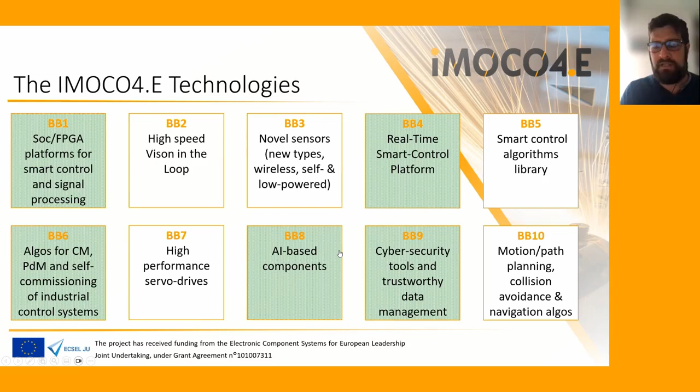The IMOCO4.E technologies can be grouped in 10 different clusters of technologies, 5 of which relate to Pilot 3, and are those depicted here in green. All these developed technologies can be seen as a sort of catalog of hardware and software solutions. And today, thanks to the presentation of Pilot 3, we will see some of them, how they have been designed and implemented in these 5 categories: hardware platforms to control the processing and transmission of data, algorithms for predictive maintenance and artificial intelligence in general, and tools for data management in the networks.

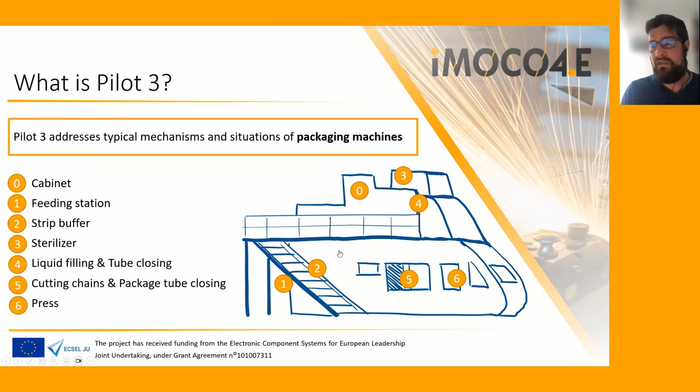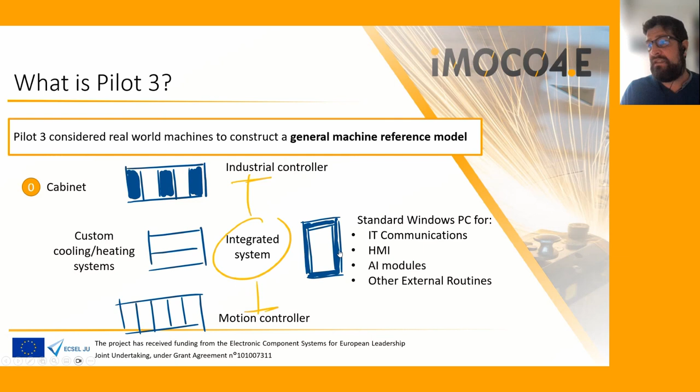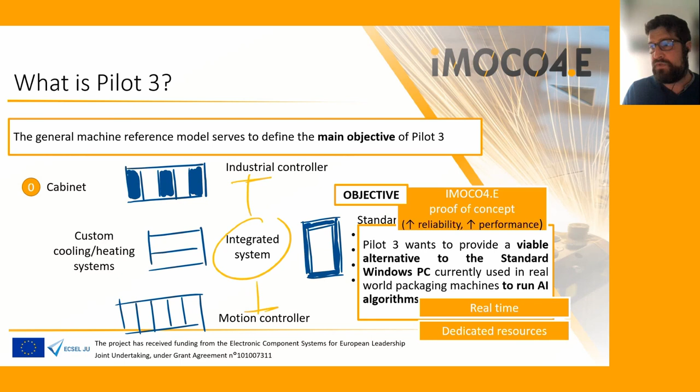But what is Pilot 3 about? Pilot 3 is about the use of the Imoco technology in the context of packaging machines. In particular, we have analyzed real-world packaging machines and defined an abstraction model in order to describe them according to the main parts that form them. And thanks to this model, we have been able to formalize easily and clearly the main objective of Pilot 3, that is the realization of a proof of concept that may allow substituting the currently used Windows PC in the cabinet of the packaging machines to run AI algorithms, with the perspective of guaranteeing real-time performance and dedicated resources, which is not possible with the current PC.

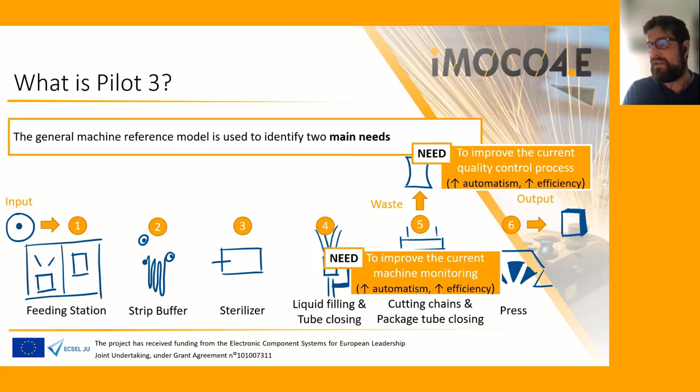The general machine reference model is also used to describe the overall process of the machine, and according to that, identify two main needs targeted by the applications considered in Pilot 3: the need of improving machine monitoring and the need of improving the quality control of the overall process. And the applications considered in this scenario are respectively a blade degradation application, in order to see if the blade works properly or presents some issue, and the improvement of the current quality control process with an application that focuses on checking the bottles in order to automate the identification of bottles that are not formed correctly and must be considered as waste.

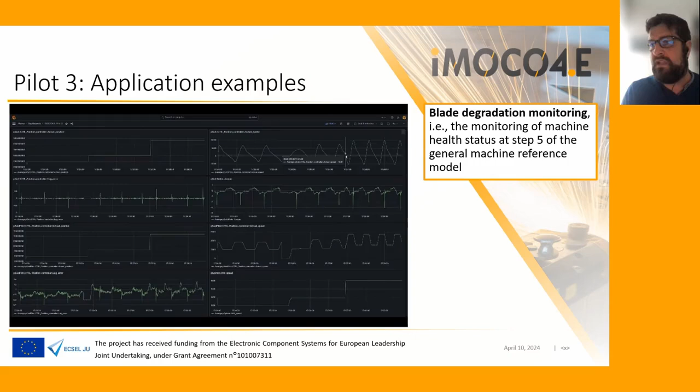So these are two screens that show you the final results in the blade degradation monitoring application and in the bottle check domain. I did the introduction of the webinar, then it's time to leave the floor to the people that actually realized the different technologies that allow reaching the application solutions. And we will start from the physical layer with the presentation of the real-time smart control platform by Fabienne of Unimore, which contains the TSN platform based on FPGA that will be presented by Daniel from SoC-e, and the Huawei Atlas 500 Pro platform that will be presented by Lorenzo of Evidence Huawei.

Then we will see how we set up the solution to transmit and archive data with GNT by Tassos, who will also present two algorithms, one in edge, one in fog environment, for predictive maintenance. And two other algorithms will be presented respectively by Dario and Tarquil. Dario from University of Sassari will present an algorithm for sensor anomaly detection, and Tarquil from Digital Twin Technology will present an algorithm for image anomaly detection. So I will leave now the floor to Fabienne in order to start with the real-time smart control platform.

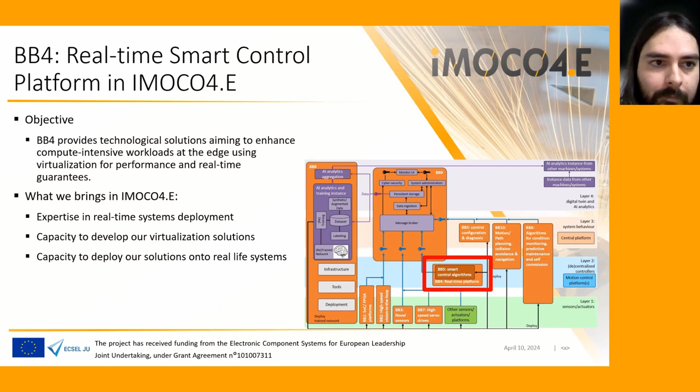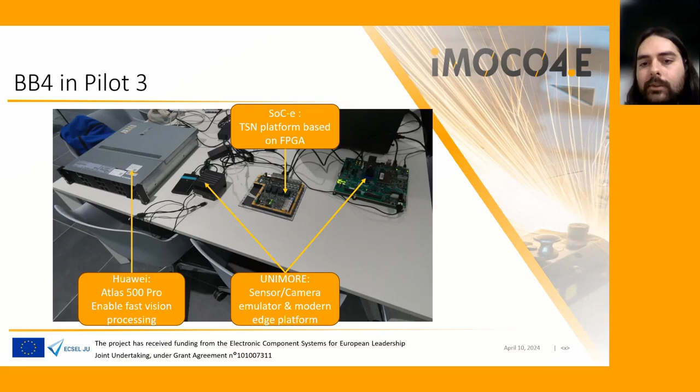But first, before presenting these platforms and the technology inside, I will present some keywords and points that are important to understand the following. The first one is time-sensitive networking, TSN. It comes from the fact that standard Ethernet communication is not predictable. So the IEEE TSN protocols help with deterministic communication and scalability. It supports flexible configuration. It also enables bandwidth reservation and helps interoperability with legacy networks.

The other point that I will present is the hypervisor Jailhouse. It's the hypervisor we use in our solution. It's developed and maintained by Siemens. It's a type 1 hypervisor, and it is open source. It has a minimal runtime code and does not perform emulation or scheduling. It has static partitioning, which means that when a resource is assigned to one VM, it cannot be assigned to another one. So we have CPU isolation, which means that on the platform, the maximum number of VMs available is the number of cores available on the platform.

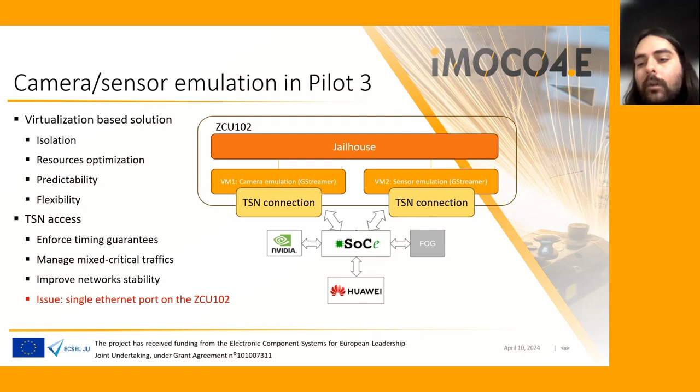However, we have an issue with that. It's that the ZCU102 has only one Ethernet port. So it's the advantage of a virtual TSN. It's that it allows us to use the ZCU with the 2 VMs and allow the 2 VMs to use a TSN connection.

So we add to this system another VM, which is the VTSN switch. And with this help, we also modified the VM of the camera and the VM of the sensors to use this TSN connection, like I presented with the TSN slide. And also, because there are 4 cores on this platform, we add the possibility to use this last core to create another VM, which will act as the actuators of the machine.

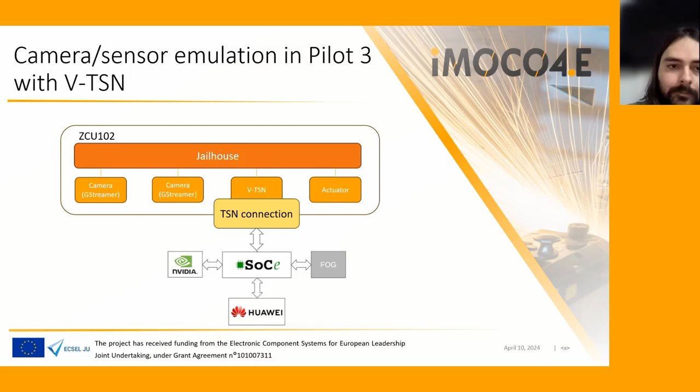So this technology, the VTSN solution, can bring some advantages for the packaging machine sector, because it allows software-defined central control units. So it means that a new software component can be deployed as VMs, and so no need for additional hardware or links between platforms. And also it is the migration from a proprietary fieldbus to TSN. So TSN infrastructure can virtually grow independently from the physical networks.

It also optimizes cost and hardware usage in constrained environments, where TSN connections can be consolidated. And it also brings predictable inter-VM communication. Each VTSN port is independently configurable, and the virtual Ethernet interfaces act as TSN-native virtual links, as I told you. So the future works of this developed technology are to port to a real-time core, for example, the Cortex-R5, and also support different platforms like i.MX8 or NVIDIA platforms like the Jetson, for example.

These 2 points are important because on NVIDIA platforms, so the Jetson, for example, there is a Cortex-R5, and this Cortex can be used to embed the virtual TSN switch, and the other ARM cores, for example, can be used by Jailhouse to create the other virtual machines.

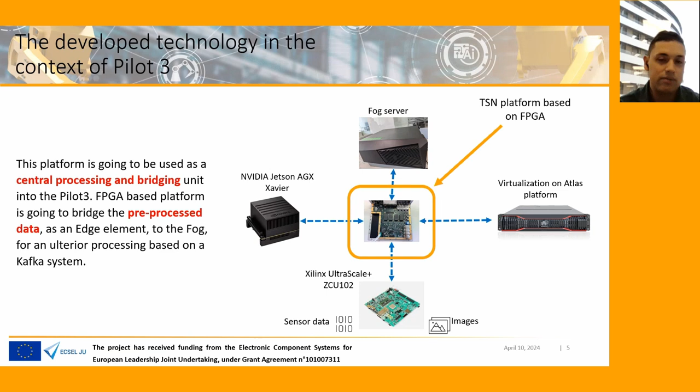When we talk about how we can leverage this technology in the packaging machine sector, we have already identified some of the challenges that can be solved by the usage of our technology. Those challenges are, for example, the increasing demand for high availability protocols with real-time capacity in the packaging machine sector, or the merging of OT and IT, which will come along with increasing bandwidth needs in this kind of networks. There are also needs for equipment with a medium-high degree of robustness and operating capacity in an extended temperature range.

Well, the first two challenges, as I mentioned before, can be easily solved with the TSN technology implemented in our IP cores, because with this technology it is possible to merge different kinds of networks into the same one while maintaining the criticality levels of some of the traffic flows. This is very helpful because it is covering the first two challenges. Additionally, for the other two challenges, our platform has been designed with robustness in mind and with heat dissipation in mind as well. So this is also why we can offer a robust and fanless hardware platform.

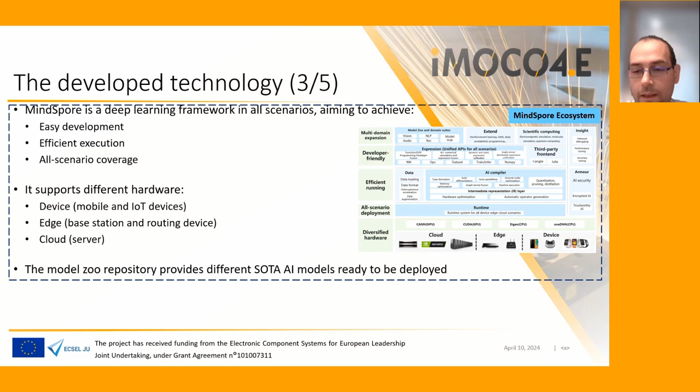The second is to develop and train the neural network using third-party frameworks such as TensorFlow or PyTorch, and then import the neural network using some dedicated tools able to apply conversion and tuning to the neural network in order to make it suitable to run on the Atlas devices. Moreover, third-party framework adaptation layers are provided for both TensorFlow and PyTorch.

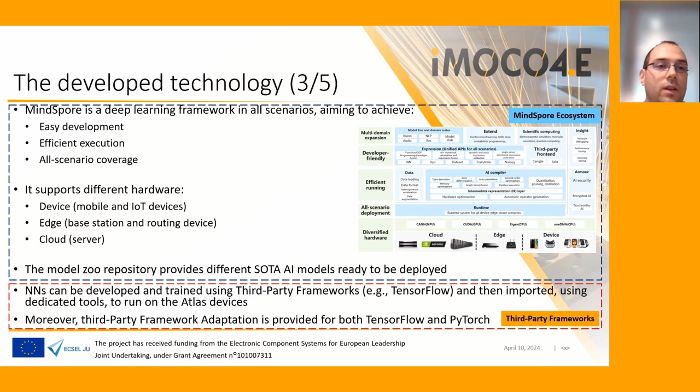In particular, inside the IMOCO4.E project, the goal of Evidence is to develop a multi-operating system solution based on this device, the Atlas 500 Pro. This device has a many-core CPU, as I already said. So the goal is to dedicate some CPUs to the host operating system, that is a Linux operating system, and the guest operating system. And as a guest, we want to use FreeRTOS virtualized via KVM in order to provide real-time capability.

Moreover, this device can provide hardware acceleration for neural networks using the Ascend chips, and also low latency communication using time-sensitive networking. Moreover, general purpose capabilities are provided by the standard Linux environment.

We are developing this solution, and the result of this development is that the proposed solution can run neural network inference on the Linux operating system using the Huawei Ascend chips, and neural networks using third-party frameworks can be easily converted into a format suitable to run on this device.

And thanks to the standard Linux environment, it is possible to integrate this device inside the scenarios required by different pilots, for example. Then FreeRTOS runs on the proposed device, and we provide a shared memory mechanism to allow data exchange between Linux and FreeRTOS, and also event-based communication to trigger behaviors or other things like that.

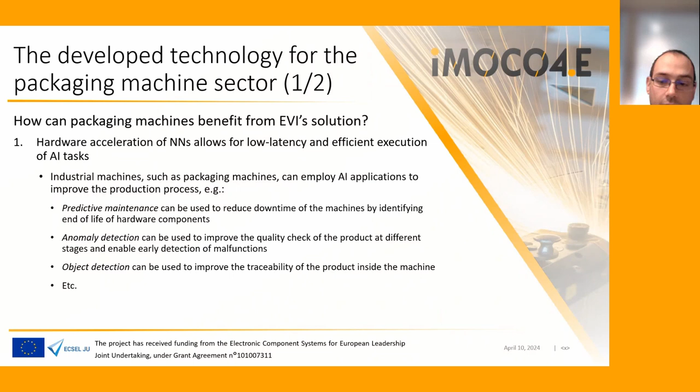Low latency Ethernet-based communication can be used to send punctual updates of the machine status to a centralized system where high-level policies can be applied. For example, policies taking into consideration the current status of many machines, or to feed a digital twin model of the machine or the entire facility. And to this aim, low latency communications are crucial to have good results.

Moreover, the proposed platform can be adapted to different use cases concerning packaging machines and other industrial machines. The solution represents an all-in-one solution to increase edge computation capabilities by providing high efficiency thanks to the ARM-based CPU and the Huawei Ascend chip, and flexibility thanks to the Linux operating system and the variable number of Ascend chips that can be installed.

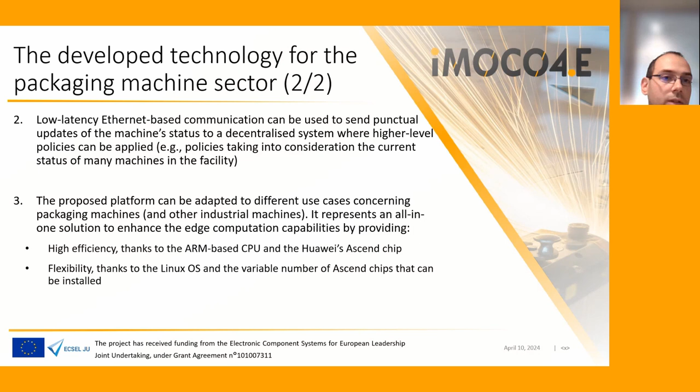As a future for this technology, we see that the proposed solution can be employed in any scenario requiring artificial intelligence acceleration, low latency Ethernet-based communication, real-time capability, and general purpose capability. And the flexibility of the proposed solution makes it beneficial for many industrial scenarios requiring the above-mentioned features. And as a future step, we can include, for example, improving the performance of the virtualized operating system, for example, the communication capability between the guest and host operating system or with the outside system.

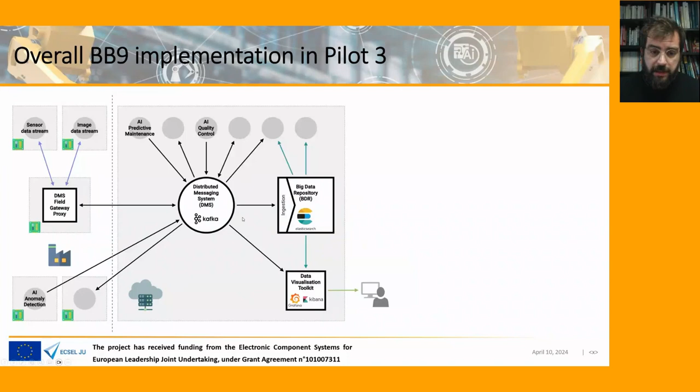So these are actually the two components I will be speaking about, the DMS, the distributed messaging system, and the big data repository, but they are also complemented by another couple of components that I will also refer to. But I will start with the distributed messaging system, or DMS, which we consider to be the backbone of the entire building block 9.

So just to put things in a little bit of context and explain why this technology is useful: in an IoT environment, it is very common to have components that need to exchange data over the network, and we can refer to the components that provide the data as data producers and the ones that receive it as data consumers.

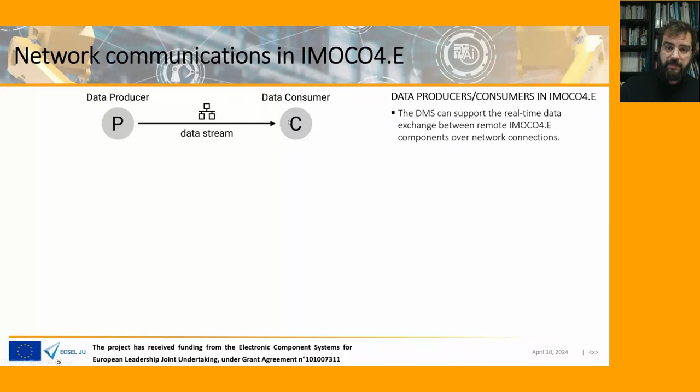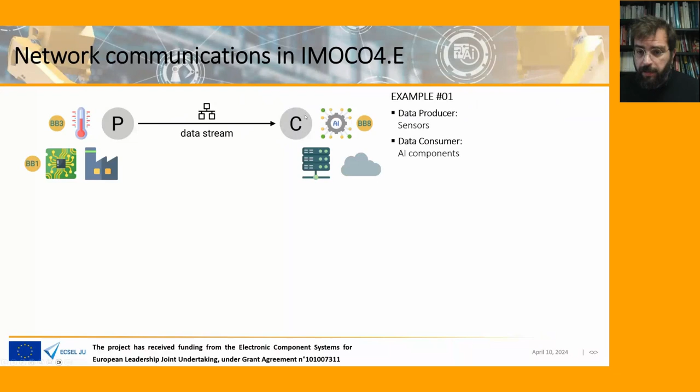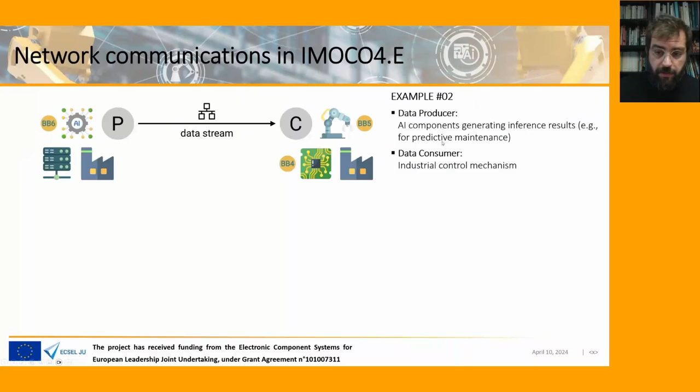So such examples in an industrial IoT context could be data producers being sensors, and then the data would be consumed by, for example, AI components. Or in another case, we can assume that we have data producers that are AI components, which produce inference results that in turn need to be consumed by some other software or hardware that controls some device, like an industrial control mechanism at the edge.

So if we were to try to establish direct communications, one-to-one communications between multiple producers and consumers, this would quickly lead to a big mess if we were trying to scale up and if we had multiple such components. For example, one first difficulty would be just to keep track of the different IPs and ports of the different services and components for managing all this communication. So this approach, direct network communications, is not really suitable in an IoT context.

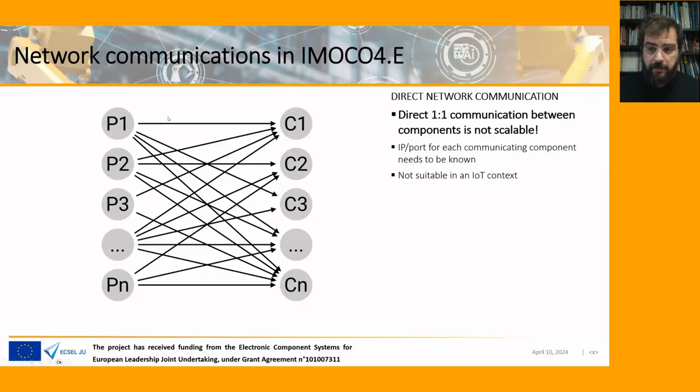And this is why with this technology, we want to introduce a PubSub messaging system. In fact, the DMS manages all this communication complexity between multiple endpoints by introducing the publication subscription messaging system. The most important advantage that this technology brings is that it provides a loose coupling between communicating entities. This is really important in complex configurations and complex systems.

And in this case, we introduce a message broker that acts as a mediator in the communication between producers and consumers. And this pattern is highly scalable. All producers and consumers of data only need to connect to the message broker, which makes it, for example, very easy to add more instances of the same services or new services.

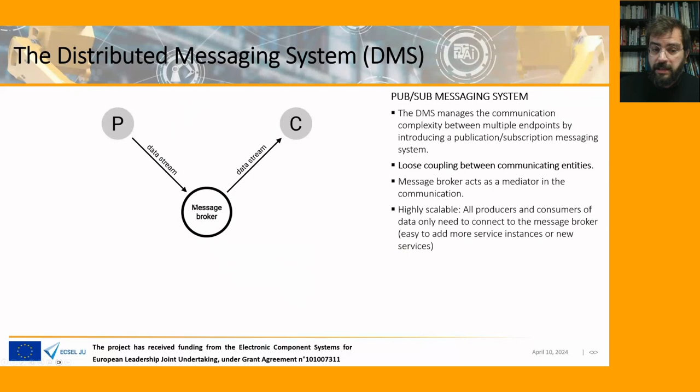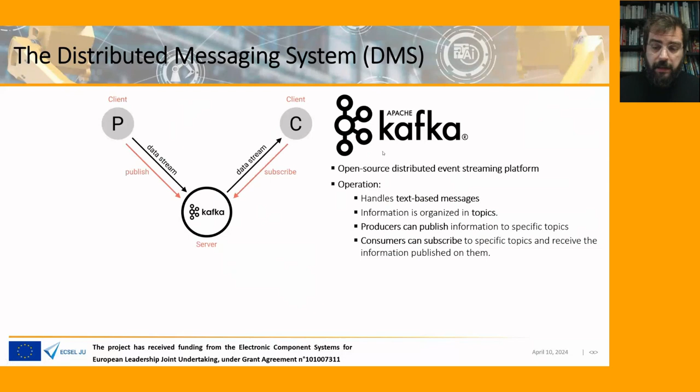Now, in order to drive this message broker, we use Apache Kafka as the underlying technology. Apache Kafka is an open source distributed event streaming platform. The way it works is that it basically handles text-based messages. Information is organized into topics, and any producer can publish any information that it wants to a specific topic on the Kafka broker, and then any consumer can subscribe to that topic or any other topic and receive the information that is published on that topic.

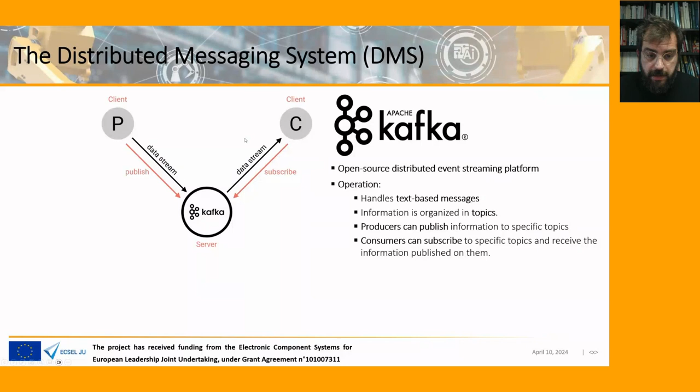So this is the very general way that it works, and it has some very significant advantages, including the possibility to have a very high throughput, which of course also depends on the underlying infrastructure that hosts the Apache Kafka cluster. It is also highly scalable, and we can have production clusters that involve thousands of brokers, trillions of messages per day, petabytes of data, and so on.

It is also an open source technology, and it allows self-managed and on-site deployment, which is of particular interest, for example, in Pilot 3, where we want the entire deployment of the system to be on-site. It is highly customizable. It is very interoperable and easy to adopt. And there are already many integrations of Apache Kafka with other third-party systems and programming languages, for example.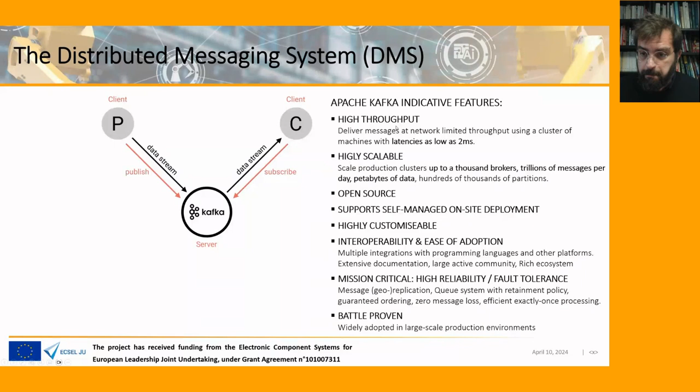It is also highly reliable and fault tolerant. It has many mechanisms to provide this, and it is also battle proven in the sense that it has been very widely adopted in large-scale production environments for many years now. So this is what things start to look like when we have many producers and consumers connected to a Kafka broker. In fact, we can have components that act as both consumers and producers.

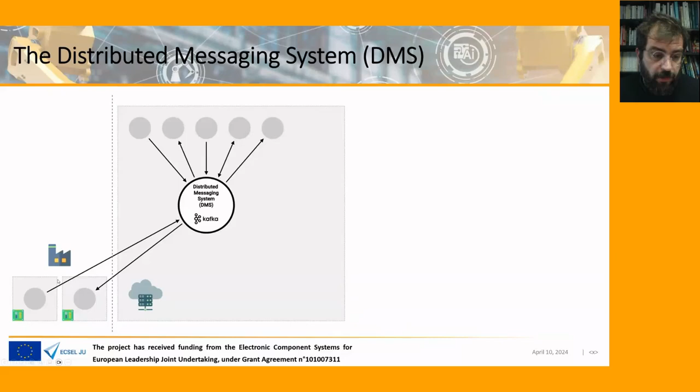And putting things in a little bit more context of Pilot 3, where we have an edge layer, which is rendered here at the left, and a fog layer here at the right. This big rectangle here represents a fog server, which hosts the Kafka broker, which can communicate with components that are on the same server or on other devices. And here, for example, in Pilot 3, we have an anomaly detection component at the edge and other AI components at the fog that exchange information with the Kafka broker.

Then I would also like to refer to this component here, which is the distributed messaging system field gateway proxy. Now, this is developed by Unimore, represented by Fabian, who spoke earlier. And this, in a sense, complements the DMS because it acts as a proxy of the DMS at the edge. And it serves as a middleware abstraction layer, allowing components from edge platforms to communicate with a distributed messaging system that resides at a higher infrastructure layer, the fog or cloud.

And it also can be used as an adapter for legacy devices and software in brownfield architectures where communication protocols cannot be changed to directly adopt the Kafka PubSub system. And another functionality that it can provide is that it can do data consolidation, data filtering, and data transformation operations in the data it handles upon demand.

Then I will move on to the other basic technology that we are contributing, which is the big data repository. Here, all information that is exchanged on the Kafka message broker can potentially be intercepted and ingested and permanently stored in an Elasticsearch repository. So then the data that is stored here can be accessed by all components that need to consume it asynchronously. For example, we can store the sensor data that can then be accessed by AI components in a training mode, for example, or to perform some long-term data analytics.

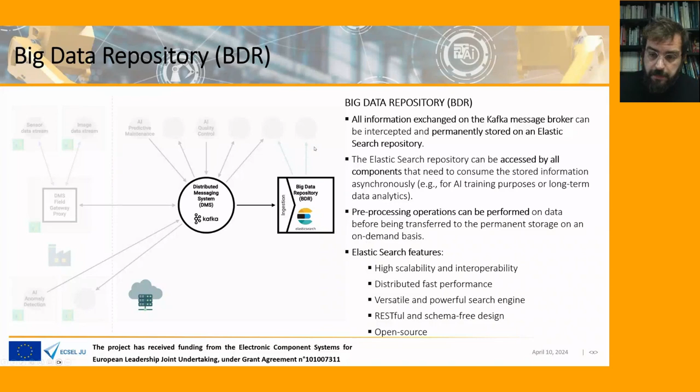Then finally, another component that complements these two is the data visualization toolkit, which is developed by ITML and integrated by GNT. It complements both the DMS and the BDR in the sense that it provides some visualization tools for these specifically. So we use the Grafana tool for visualizing real-time data that is handled by the distributed messaging system. And we can also use Grafana for generating alerts and notifications either by email or by integrating them with the instant messaging platforms.

And on the other hand, we can provide the Kibana tool, which can be used for visualizing historical data that is stored at the big data repository. And we have, in fact, used both of them to create visualizations and dashboards for the needs of Pilot 3, which we can have a look at here. So, for example, this is a dashboard made in Grafana that is used for visualizing some key health and performance metrics of the deployment of the distributed messaging system, so of the Apache Kafka cluster.

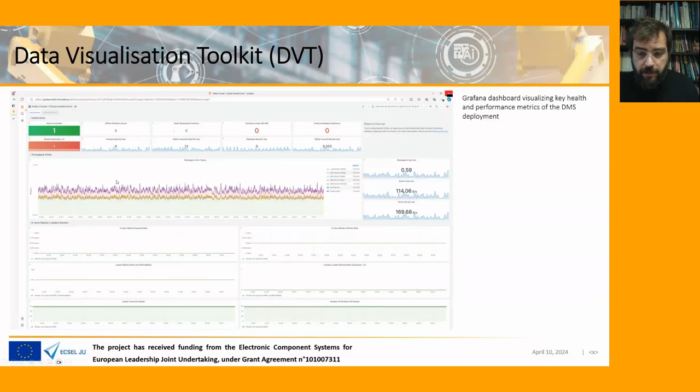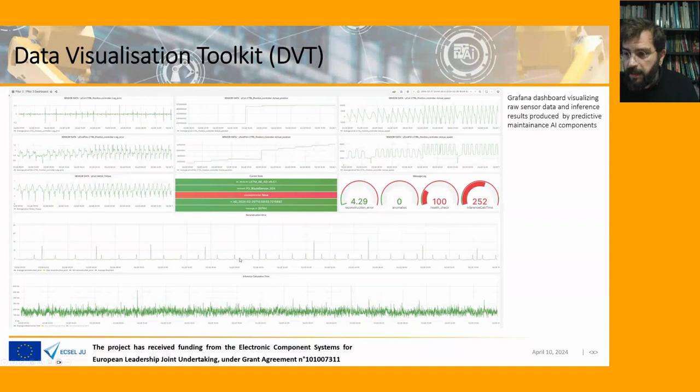This dashboard is specifically built for visualizing the data from the sensors in the upper part here, and then some inference results by one of the AI components employed for Pilot 3. And here at the bottom, we can actually see one of these inference results in more detail. This is the reconstruction error for the anomaly detection provided by one of the AI components for predictive maintenance. And at the lower left here is the inference calculation time by the same component, or the latency of that component.

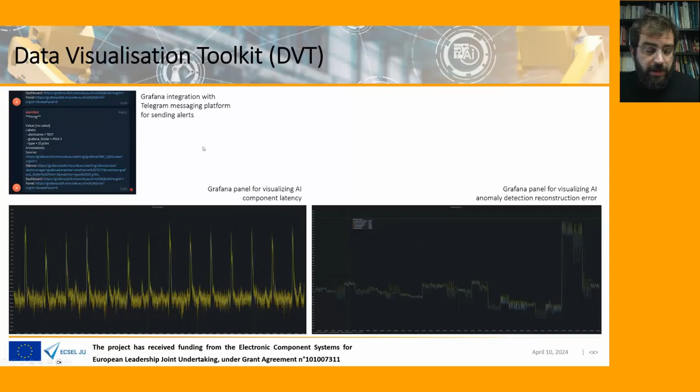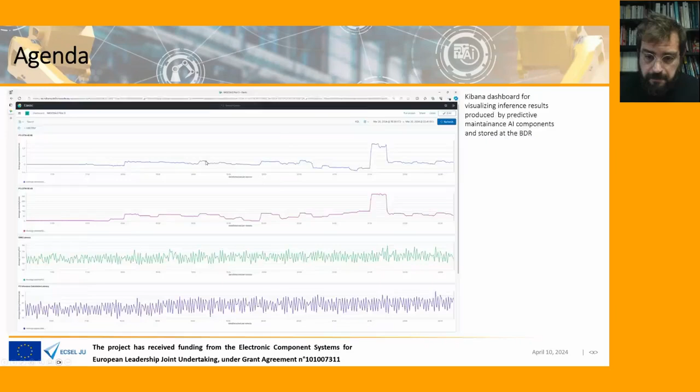And this is it, basically, regarding the implementation of building block 9 components in Pilot 3. I think this covers it.

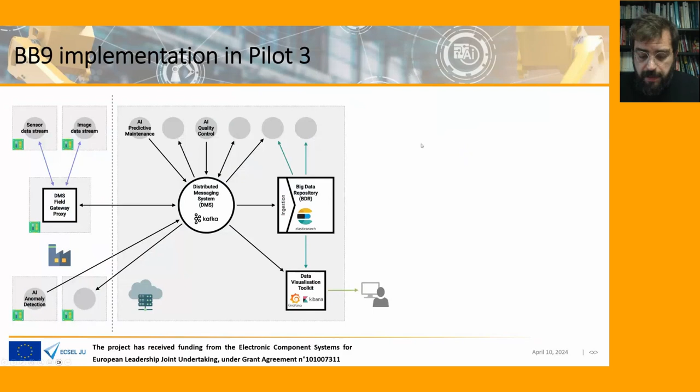And I think I can jump directly to the next session, if you agree, Ricardo. Yes, of course. Of course, Tassos, thank you.

Which is about anomaly detection for predictive maintenance. So by predictive maintenance based on anomaly detection, basically we refer to an analysis of sensor data using artificial intelligence techniques to detect specific patterns and early warning signs in order to predict problems before they occur in the industrial equipment.

So from our side, from the side of GNT, and in fact in collaboration with another partner, ITML, we have implemented two approaches for anomaly detection in predictive maintenance. On one hand, we have a component that is intended to be deployed in a fog or cloud environment, and that is a long short-term memory autoencoder deep learning model.

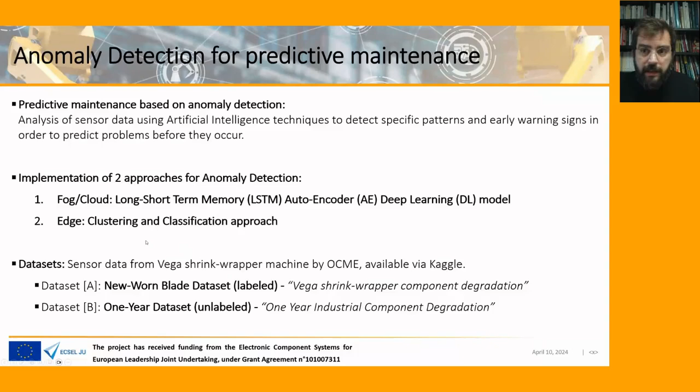And the second approach we have taken is more oriented towards edge environments, and this one is based on a clustering and classification approach. Now, for both these approaches, both resulting components have been based on the same datasets, which refer to sensor data from a Vega shrink wrapper machine by Ocme. These datasets are available from Kaggle. And there are, in fact, two datasets from this device that we have considered, which I will now refer to in a little bit more detail.

The first dataset is a labeled dataset that has specific snippets from such a device that has a new blade installed, and there are some other snippets from a machine that has a worn, a rather used blade installed. So these are very clearly labeled, although they are limited in size. We only have 3 snippets from a healthy blade and 3 from a worn one.

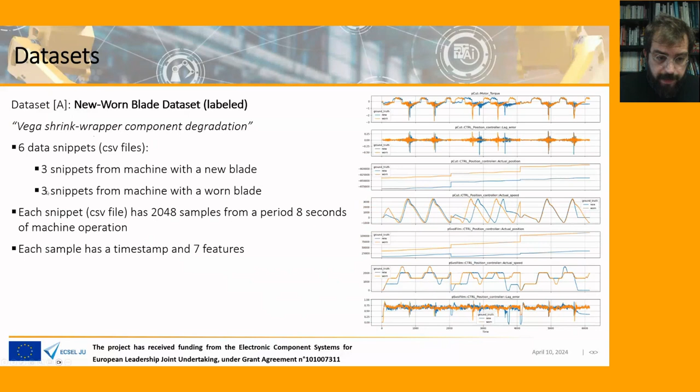Now, the other dataset that we considered was more longitudinal in a sense. It is from an entire 1-year operation of a machine. And this one includes 518 such snippets. And in both cases, there are 7 features in each sample, in each data point. This one actually has an 8th one more.

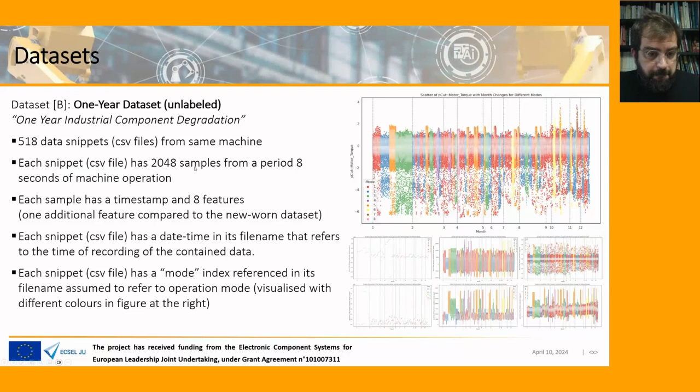So I will now talk about the first approach we have taken, which is oriented for deployment in a cloud or fog environment, which is to say an environment where we are less constrained in terms of computational resources. And for such cases, we have proposed a deep learning approach that combines an autoencoder model with a sequential network, and specifically a long short-term memory network.

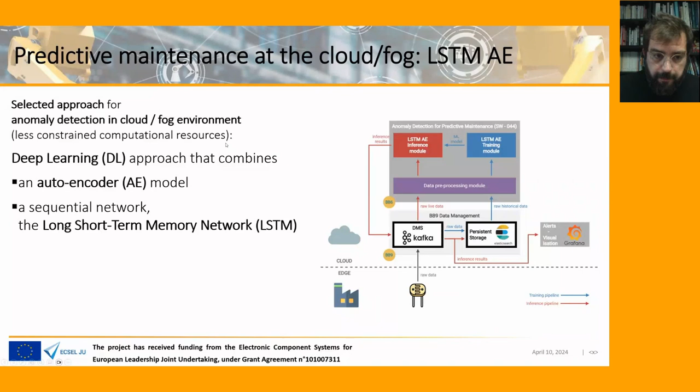Now, more details about the autoencoder model in general. One of its advantages is that it provides a single model that can learn at the same time both features and representation of normality, which means that it can learn feature representations of normality. And this is not possible, for example, in other deep learning approaches for anomaly detection.

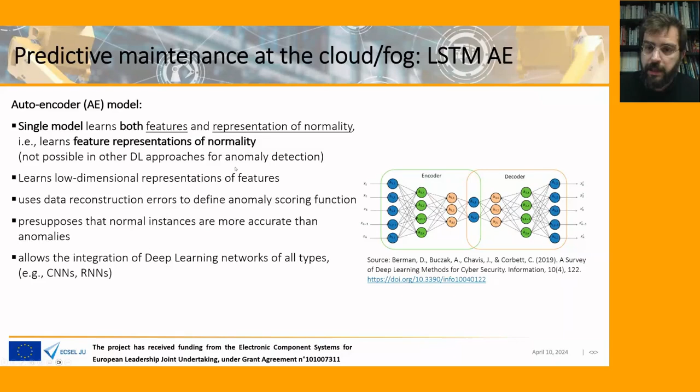It can also learn low-dimensional representation of features. It uses data reconstruction errors to define anomaly scoring functions. It presupposes that normal instances are more accurate than anomalies. And it also allows the integration of deep learning networks of all types, including convolutional neural networks and recurrent neural networks.

And a few more details about the long short-term memory networks. So being a sequential model, an LSTM network is able to capture temporal dependencies in time series data. This is particularly important in the context of Pilot 3, where we are meant to analyze time series data from sensors. It also allows information persistence that is valuable for capturing temporal dependencies, again, important for the same reason.

And it is quite similar to recurrent neural networks, but it is considered to perform better in tracking long-term dependencies in the data. So it addresses the vanishing gradient problem. Then another feature is that it can maintain data in memory for long periods, and this makes LSTM networks highly applicable for sequential data processing, such as sensor data stream analysis.

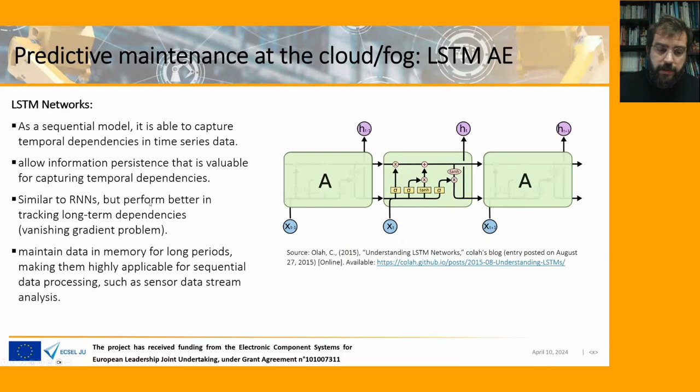Now, for this model, we have implemented an anomaly detection mechanism that uses anomaly scores, as opposed to just a binary label that is less informative. So that would be just classifying something as being an anomaly or not. So an anomaly score has more granular, more gradient information hidden behind it.

And the anomaly scoring is calibrated using the reconstruction error for the normal representation, and values that exceed a threshold are marked as anomalies. Reconstruction errors of the normal data are modeled as a Gaussian multivariate distribution, and the anomaly score for new data points is calculated using the Mahalanobis distance, which is essentially a distance between a point and a distribution.

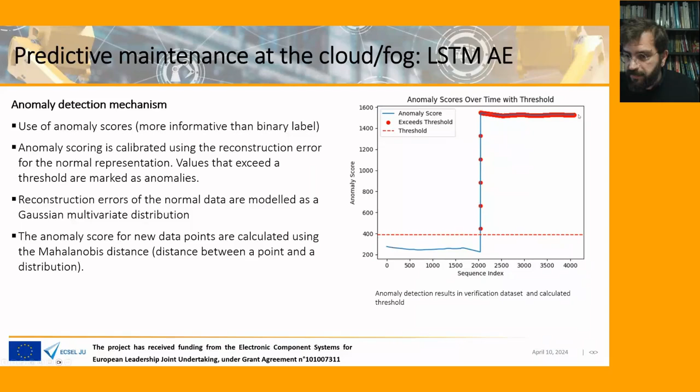And at the right here, you can see the application of this mechanism in the dataset. And here you can see that the threshold that has been calculated is represented with this horizontal line, and the data points above this are classified as anomalies.

Now, we have also introduced some specific optimizations and customizations to the, let's say, more generic version of the LSTM autoencoder model. The first one is that we have introduced an adaptive anomaly scoring thresholding function. So in this case, we do not have a static threshold, but it is rather determined through the maximization of the weighted average of precision and recall, which is basically the F beta score.

We have also performed some considerable hyperparameter tuning. We have specifically used Bayesian optimization to select values for multiple parameters of the LSTM autoencoder model to maximize its performance. Thirdly, we have also done some work in determining an optimal sequence length. So in the sense of the number of time steps that the LSTM network will consider at any given time during training or inference. And here we have tried to find a balance between computational efficiency and model performance.

And finally, we have done some work with a calculation of the F beta score that I mentioned previously. And this basically determines the balance between precision and recall in an anomaly detection model. And as I said, it also indirectly influences the thresholding calculation.

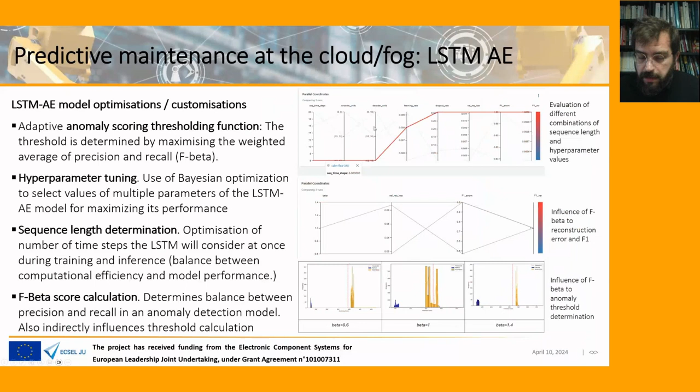So with all this, we have tested the model we developed in the first data set, the new/worn data set. This has been employed for supervised or semi-supervised training and evaluation. And in order to proceed, we established a model training and evaluation strategy that was based on a reorganization or splitting of the data that was available into 7 different groups with different purposes, in each case, for training, validation, evaluation, and either being normal or anomalous data or mixed data inside.

This table here in the middle shows the hyperparameter values that we arrived at after running these optimization procedures. And at the right here, we can see some final evaluation results of the model in some of the cases. So at the top is when we tested it against the anomalous dataset that we have reserved for validation. Here are the results for the dataset reserved for validation on the mixed use case. And as you can see, the results are quite excellent. We managed to achieve a 100% score in accuracy, precision, F1, and recall, which is, of course, very good.

But on the other hand, we also need to consider that the dataset was quite limited. And as we discovered, the labeled dataset, the new and the worn variants, had some features that were very clearly distinguishable from each other. So we managed to achieve such high scores. But of course, we need to be cautious about whether this can be generalized easily to some other data set.

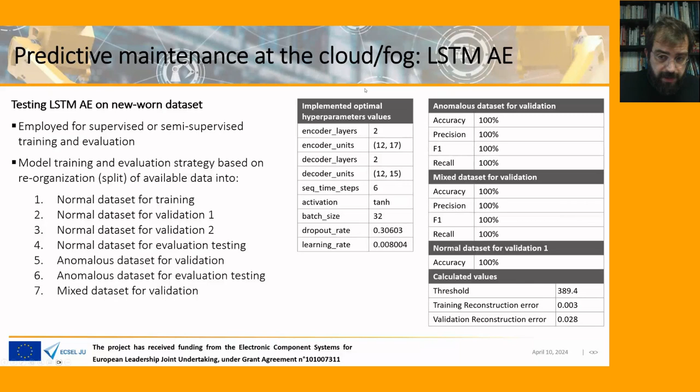Now, we also tried to make some experiments using the 1-year data set. However, here we were even more limited because we could only use this for more informal verification purposes due to the labeling ambiguity present in this data. So we also had to make some hypotheses for the training of the model. So we assumed that the first month of the data referred to a healthy blade, and the last month, month 12, refers to a worn blade, so that we would have anomalous data.

And training the model based on this hypothesis, this is what we managed to get over the period of 12 months. This is a plot of the anomaly scores that we got for the entire 12-month period. And we also tried to fit a line using regression over these data. And we can notice here that there seems to be an increasing trend of anomaly score over the 12-month period. And also we can see that there is some kind of extreme peak here in month 4, but this, in our opinion, agrees with some outliers that were detected in one of the specific features in the data set.

And then finally, we also implemented a logistic function for calculating a system health, which ranges on a 0 to 100 scale. And this is to have something more intuitive, more human readable, that makes some sense. And the result has been plotted here with a red line. So this is the system health ranging from 100 to 0. And we can also observe here that the health seems to somehow degrade over time during the 12 months. And we can also notice that there are increasingly frequent and severe declines over time. So these negative spikes here, you can see they become more frequent and go lower.

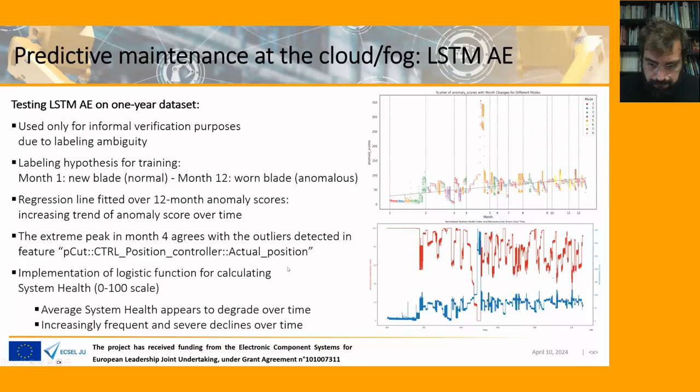That's it basically for the first component, the LSTM autoencoder. And now I will jump to the second one, which is oriented towards edge environments. So in this case, we are using clustering analysis on unlabeled data sets to determine classification categories. In our case, we are interested in normal and anomalous data. And based on the clusters we can identify, we can train a classifier machine learning model, which can then be deployed at the edge so that it can predict the category of new incoming data points in real time.

Now, the motivation behind this approach, this AI component, is that we wanted to try to use clustering to determine normal and anomalous data in unlabeled data sets. So in a sense, employ unsupervised learning. And also, we thought to use this approach because it would lead to a lightweight classification model that can run on edge devices which have constrained resources.

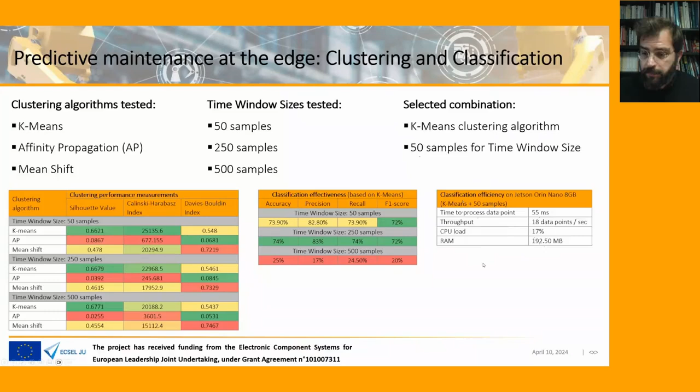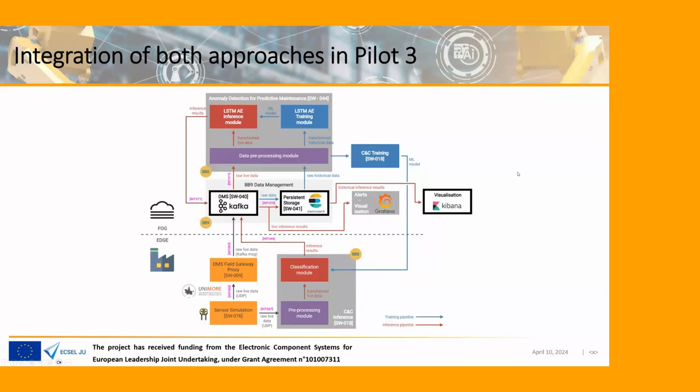Good morning, everyone. I am Dario Guidotti from University of Sassari, and I will briefly present the algorithm we developed for anomaly detection.

Well, I will not be too long on autoencoders because Tassos already presented how the model works. So you have a classical fully connected neural network in this example, which encodes the characteristics of the input space defined by the input dataset in a smaller latent space, and then decodes this latent space to the output.

If the input and the output are the same, what happens? When the input data are anomalous, the predicted output is more distant from the input we would like to predict. Therefore, if you compute the vector reconstruction error, so some kind of difference between the output predicted by the network and the input provided to the network, you can have a measure of how anomalous the data you are considering are.

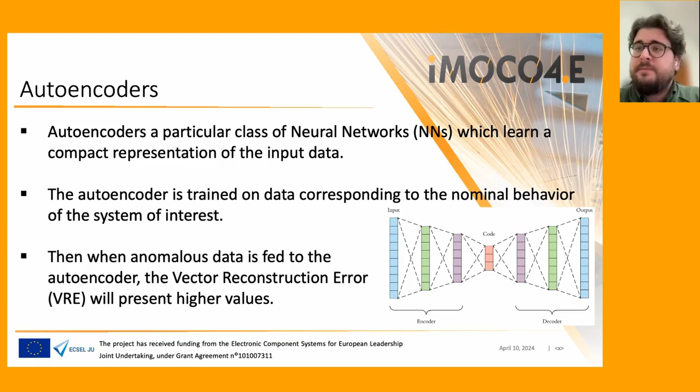Then we trained our network and we first considered the mean square error, a standard measure of how good the network is with respect to the data used during training, for 4 different small network architectures with an increasing number of neurons in its 3 hidden layers and with the standard ReLU activation functions. We tried to keep the network architecture very simple, because our aim was, after training, to formally verify the network in order to give some kind of formal guarantee on the behavior of these networks.

As you can see, curious thing, given the trend of current neural networks, the smaller models were able to reach a better mean square error than the bigger models. Obviously, this kind of result is good to have an idea if our autoencoder is able to correctly predict the data from the normal functioning of the machine. But it doesn't say anything about if our autoencoder is able to detect the anomalous data.

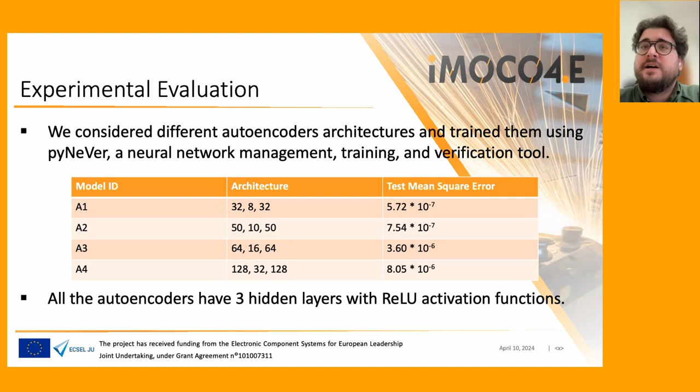To be able to say something about this last behavior of the autoencoders, we computed the vector reconstruction error on the whole dataset of interest, and we plotted it. From our plots, it appears clear that the major anomaly present in the dataset is during month 4, and it is clearly detected by all the autoencoders considered.

After some research on other people who used the dataset, which, as you heard, is a public dataset on Kaggle, we deduced that at month 4, the blade was changed. Therefore, you have this big anomaly, because during month 4 the blade failed and was changed, and then it worked again correctly. These minor anomalies you see during the following months should be based on the change of mode of the machine, from our experiment.

If you color the plot with a different color for each mode of the packaging machine, you see that these small peaks in the vector reconstruction error correspond to changing the mode of the machine. So clearly in our inference software, when the prediction of our autoencoder surpasses a certain reconstruction error, then we can identify that data point as an anomaly.

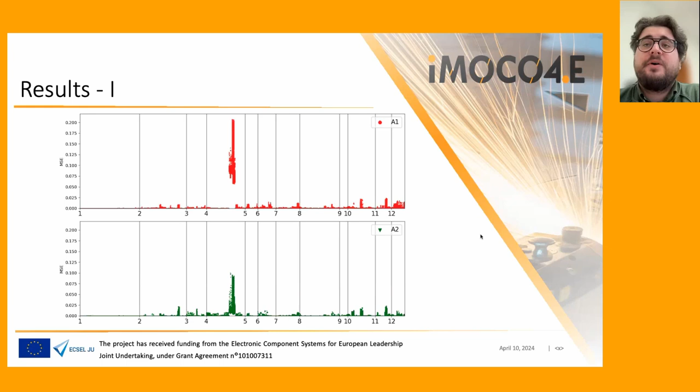Our algorithm communicates with the distributed messaging system DMS, which forwards us the sensor data of the machine, and then we respond with some information regarding the anomaly, in particular the vector reconstruction error and the flag which indicates if the particular data point is to be considered anomalous or not. And then the information is propagated to the rest of the iMOCO4E framework.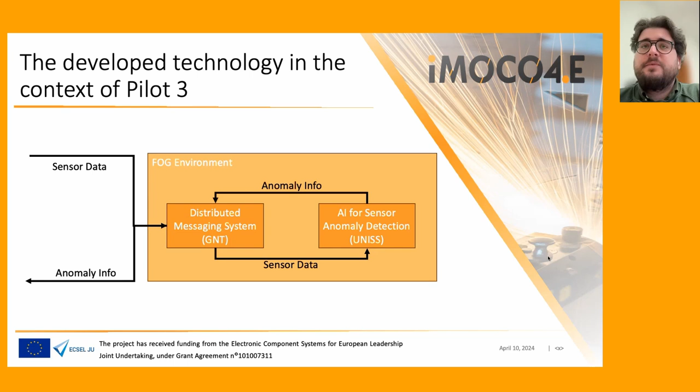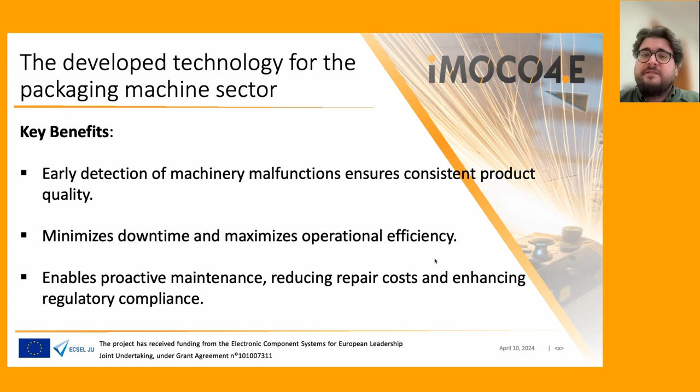The benefits of this kind of algorithm were already mentioned by Riccardo at the beginning of the presentation, but in general, why do we want to detect eventual anomalies in the machine earlier? Well, it's because it ensures that the product quality is consistent. We can minimize the downtimes and maximize the operational efficiency, and we can maintain the machinery in a proactive way instead of a reactive way.

Again, this kind of technology, given that they are very small, very simple neural networks, can be applied to more or less any kind of platform, and therefore it has quite a lot of potential applications. And obviously, the anomaly information can also be used in some kind of monitoring dashboard for human users.

And that's it. Basically, for the future, some things that can be done to enhance these kinds of techniques are clearly some kind of predictive analytics to forecast machinery failures before they occur. For this, you need some kind of model which can predict the values of the sensor data in the future, given the past sensor data. And then we can also think about optimizing the maintenance schedule based on the results of this kind of algorithm.

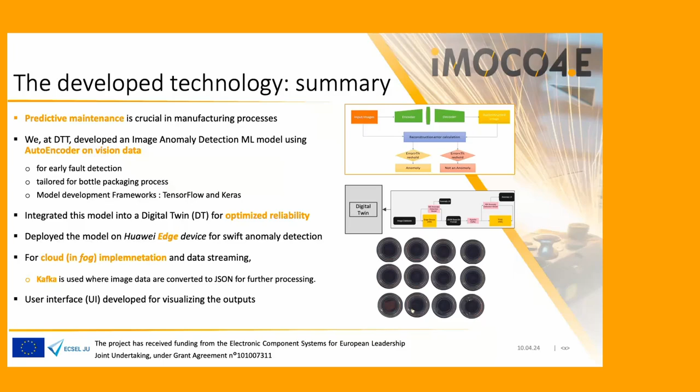And this model is developed using frameworks like TensorFlow and Keras, and we have integrated this model into a digital twin for achieving optimal reliability. Apart from this, we have deployed this model on edge and also on a fog platform with help from Unimore. And we have also developed a user interface for the visualization of the prediction output.

So here I present the steps of building the autoencoder ML model. We developed this model using TensorFlow and Keras, and then trained the model on the bottle dataset. In this figure you can see a glimpse of the dataset, and it contains images with and without contaminations like broken rims, discolorations, or residues, which can be seen on the last row of this image.

So my previous speakers have already explained the details of autoencoder models, so I don't want to go through the details of the architecture of the model. It basically contains two main modules, an encoder and a decoder, and finally the reconstruction error is calculated, and if this error is above a certain threshold, it reports that this image contains an anomaly. If not, then it is not an anomaly. So this is the basic idea of the architecture of the autoencoder ML model.

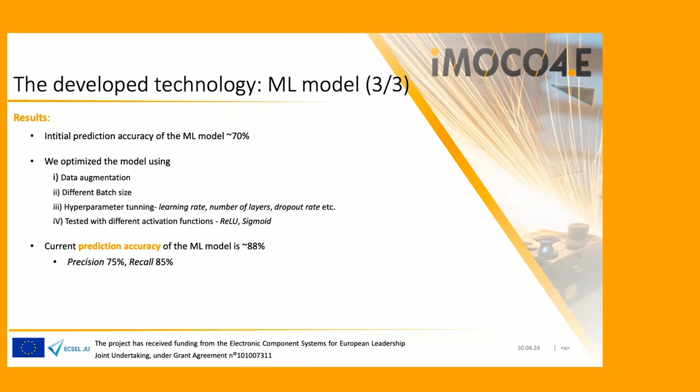Okay, now here, okay, so it's still playing. Let's stop it.

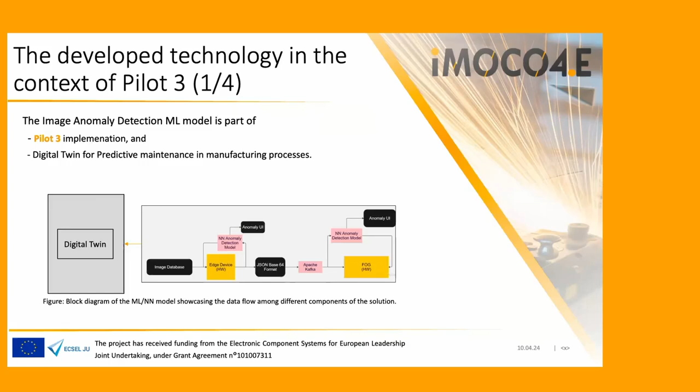So as I mentioned earlier, this model is deployed on an edge platform and also on a fog platform. And this figure here shows the illustration of the deployment on the edge and on the fog platform. Here we can see that the image data are fed into the ML model. The model is deployed on the edge platform, specifically on a Huawei Atlas device, which my previous speaker, Lorenzo, already told about.

And this model here predicts the anomalies on the incoming image streams, and from there the images are converted to JSON format for the seamless streaming to the cloud environment. And for the streaming, we use Kafka.

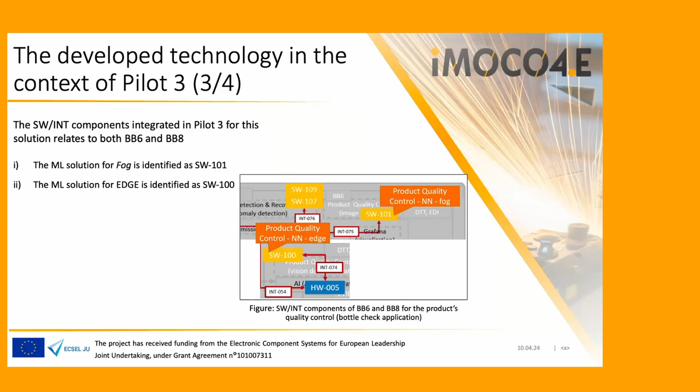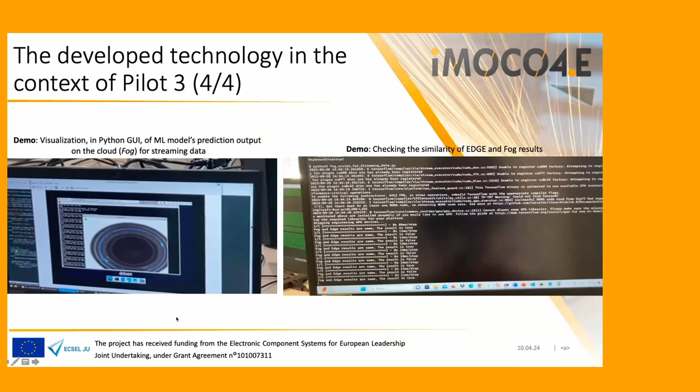It's still playing here. Let's stop it.

Okay, now I'll talk about the adaptability of our technology in the manufacturing sector. Our technology, which we developed through this ML model, makes significant strides towards achieving predictive maintenance in manufacturing through vision data analysis, and it shows quite good performance for the bottle packaging processes. So this model can be adapted to other industries, such as the semiconductor industry, in which detecting anomalies is really important. In this case, this model can be adapted to detect defective chips in the chip manufacturing process.

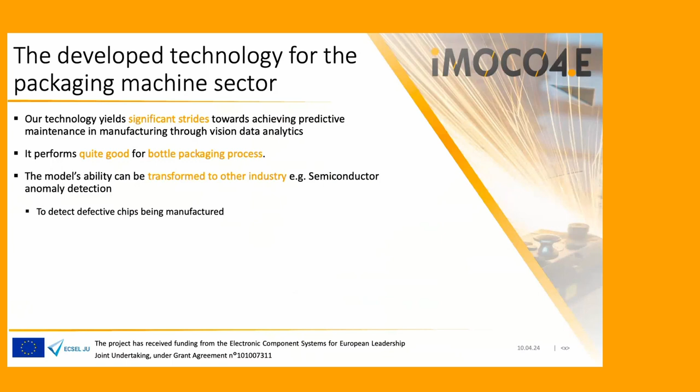Now I present a few notes on the future of our technology. The unique selling point of our technology is that it can be seamlessly integrated into an existing manufacturing process, and we can use transfer learning, multimodal fusion, and also specific training methods to use this model in another manufacturing process, which could be beyond iMOCO4.E's scope. And we can implement this technology in similar manufacturing processes which can benefit from such predictive maintenance.